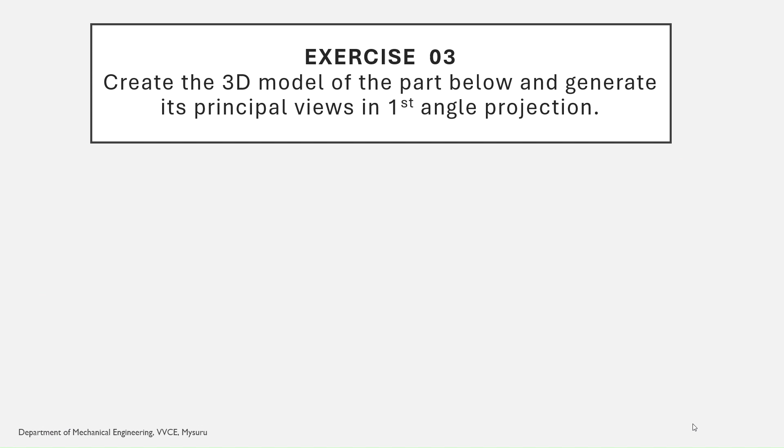In this video, we shall see how to create a part model and also prepare the draft for the same using the Solid Edge 2023 version. We need to create the 3D model of the part shown below and also generate its principal views in the first angle projection. This is the part we are going to create first using the part modeling of Solid Edge 2023, and then create the draft of the same.

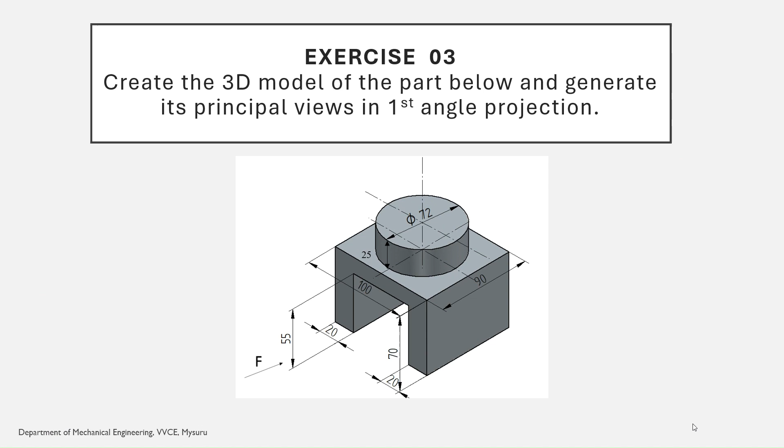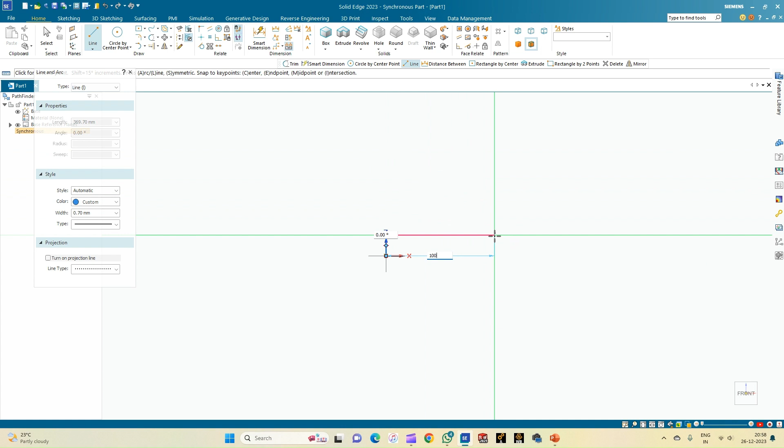Now I'll move the cursor over the XZ plane and the lock symbol indicates that the plane is locked and we can start with the drawing. The height is 70 mm and it is having a length of 100 mm. Let me complete the rectangle first. 70.

Now I'll fit this to the screen so that it is visible. And now let me go to the smart dimension. It is having a height of 70 and a length of 100.

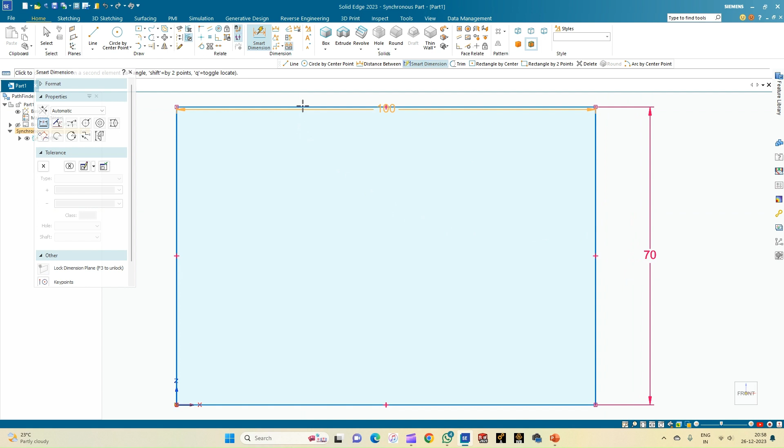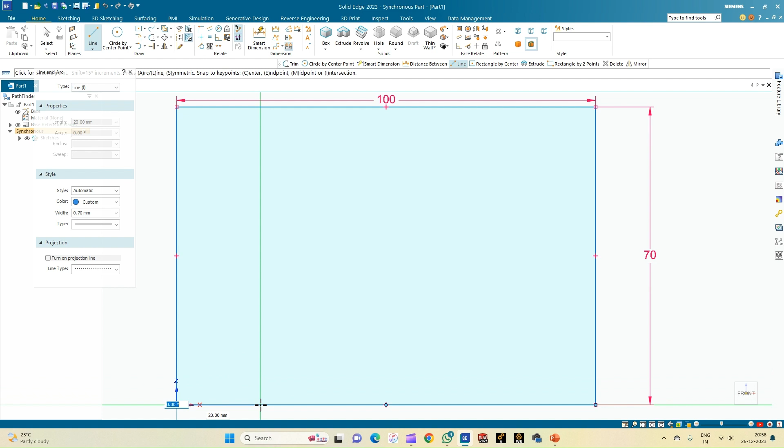Now I have to create one more rectangle for the web that is having 20 mm. I'll create, for reference, a 20 mm line, and that should be till a height of 55 mm, followed by the total width of the cutout which is 60.

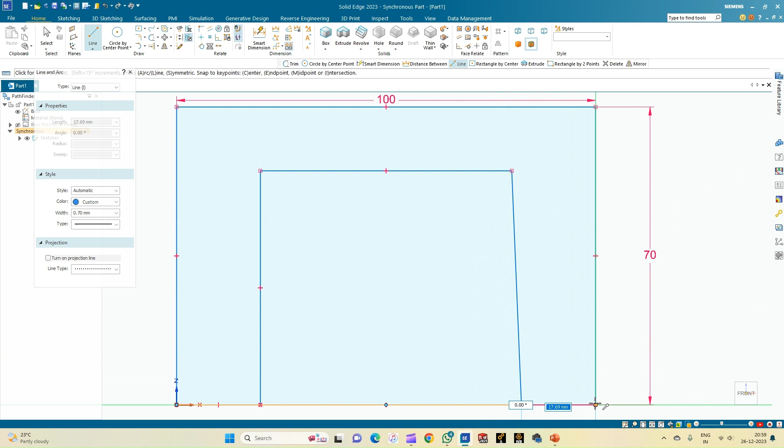Let me complete this profile and ensure the line is exactly plus 90 degrees. I'll go for the trim option. I'll trim this, and there are two more lines to be trimmed, and now this part is ready.

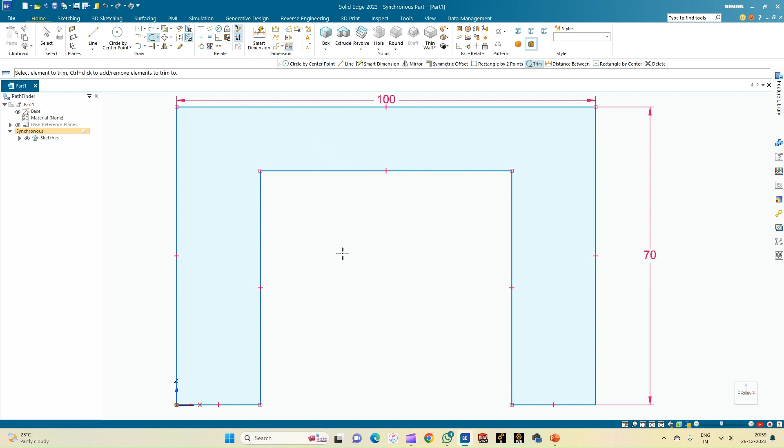Now we have to extrude this part to a distance of 90 mm as per the drawing. I'll go for select and select this, and by pressing the scroll button of the mouse I'll be able to rotate, and let me extrude this to a total distance of 90 mm.

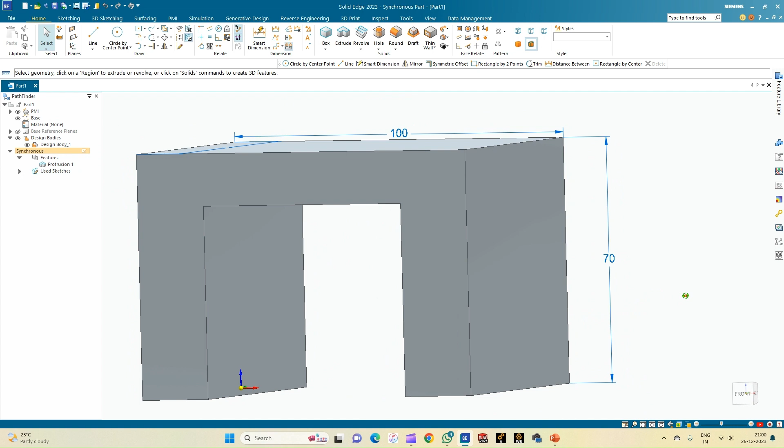I'll click on fit again. You can see that the part is ready. This is the front view of the part. You can just see this.

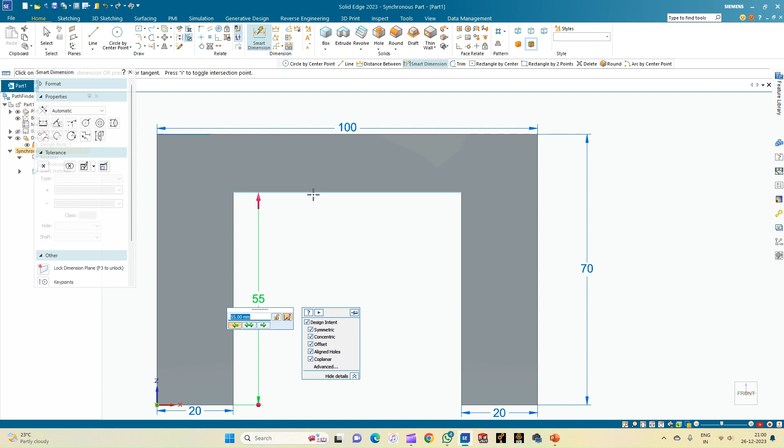Let me show the dimensions. This is 20, a web of 20 mm on both sides, and the height is 55. This is well understood that it is 100. This is 20 and 20, so this shall be 60 mm. 60 plus 20, 80 plus 20 is 100. And now it has also been extruded to a distance of 90 mm. This is the front view.

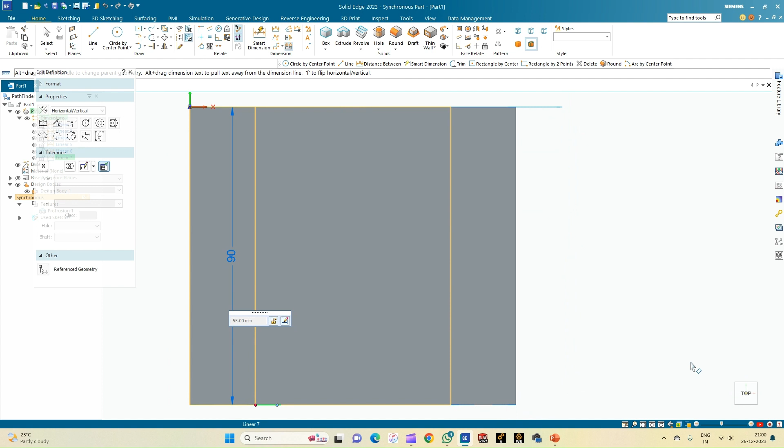But on top of this rectangular web, there is also a cylinder of height 25 mm and a diameter of 72. To create that, I'll select the top plane, and now I'm going to draw the circle.

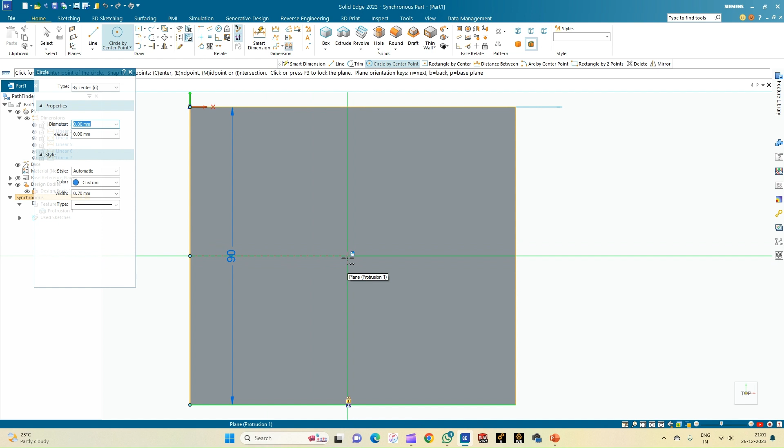To draw that circle, I'm going to take the center point of this particular rectangle as the reference and move the cursor and also mark the center of this. So I'm getting the center here. Let me draw a circle of any arbitrary diameter.

I'll go to the smart dimension, measure what is the diameter. So the diameter is 72. But you can just still see that it is not exactly at the center.

So let me select the top view, go for distance between. I'll select the circle, center point of the circle, and also the center point of this, which is exactly 45. Again I'll select center, move the cursor over the circle so that the center point is highlighted, and then select the center point of this particular rectangle. You can just move the cursor here.

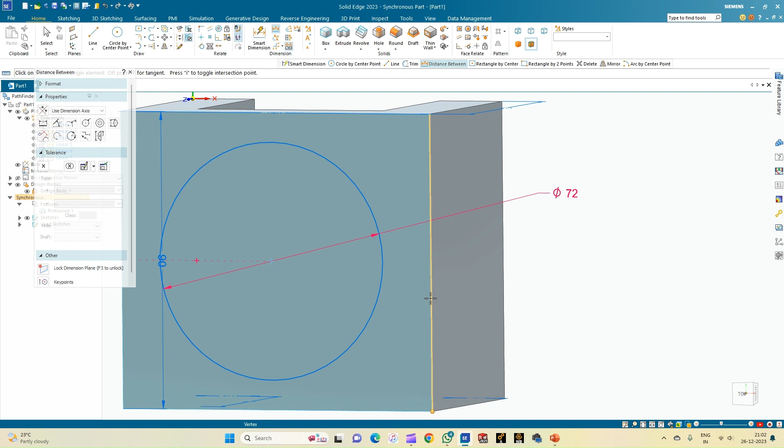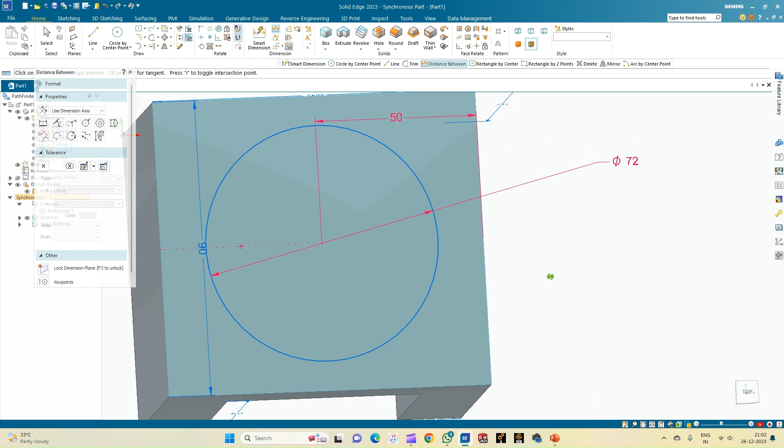You can just see that it is not exactly 50, so I'll enter 50. Now the circle is exactly at the center of this particular rectangle, that is 90 cross 100. So this is the top view.

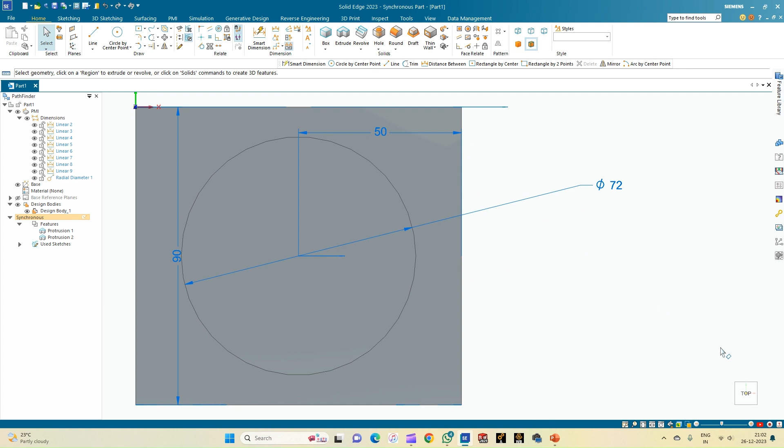Now let me select this particular circle and extrude this circle to a distance of 25 mm and press enter. So this is the top view of the web. And now I'll be generating the front view. So this is the front view. So this is the completed part.

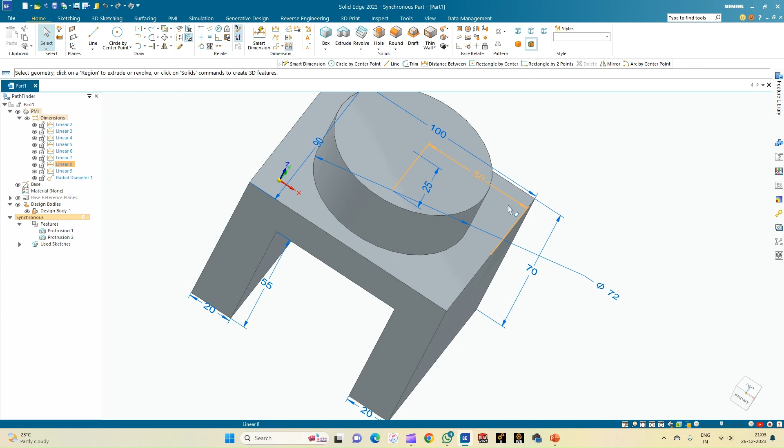So you can see it is having a dimension of 55 cross 50 here, with web on both sides of 20 mm thickness, and the total extruded length is 90 mm. Over that there is a circle of diameter 72 to a height of 25 mm. So this completes the generation of the part diagram.

So this is the isometric view of the particular part. Now let me save this. Clicking on the save icon, I'll enter it as exercise 03. Click on save.

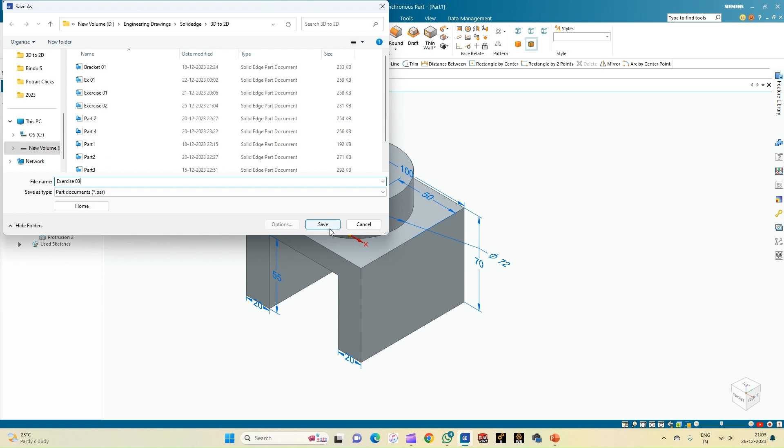Now to create the draft of this particular part, I'll go for new, select ISO draft. I'll right click on sheet 1, select sheet setup, select A4, untick show background, click on save defaults, click OK, and let me fit the sheet to the screen. So I'll click on view wizard and select exercise 03, click open.

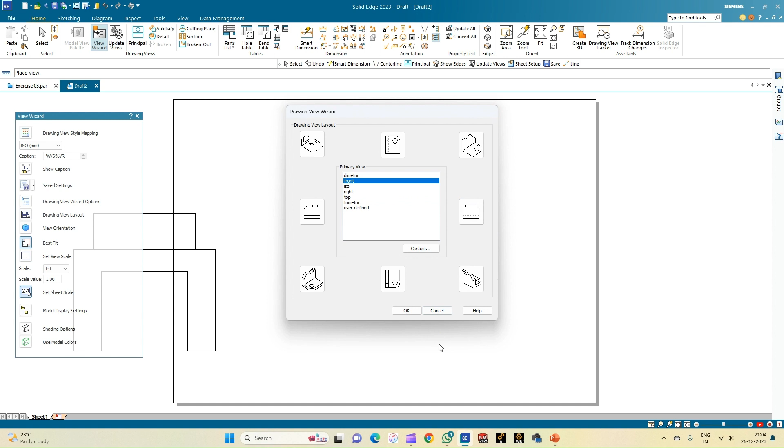So I can go for the drawing view layout. Let me select front view here, click OK. So I'm getting the front view, the corresponding top view, and this is the corresponding side view of the part. Now I'll go to the sketching window, select the line option.

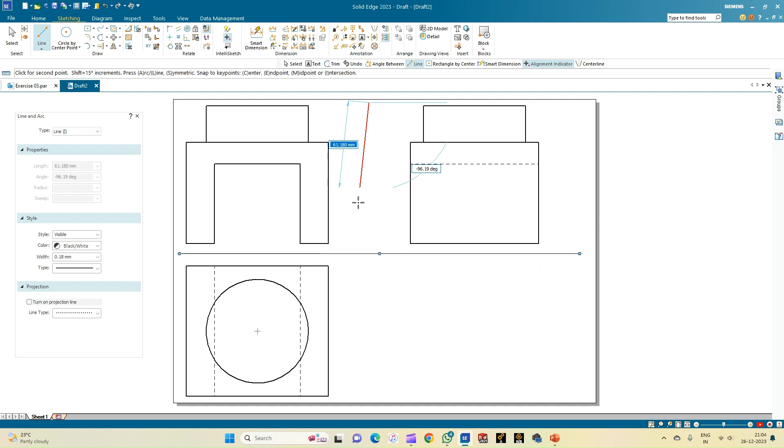Then select the thickness of the line to be 0.18 for drawing the XY line. So I'll draw the XY line here and draw the profile plane, that is X1, Y1. So from the point of intersection, let me draw the 45-degree line to generate the side view.

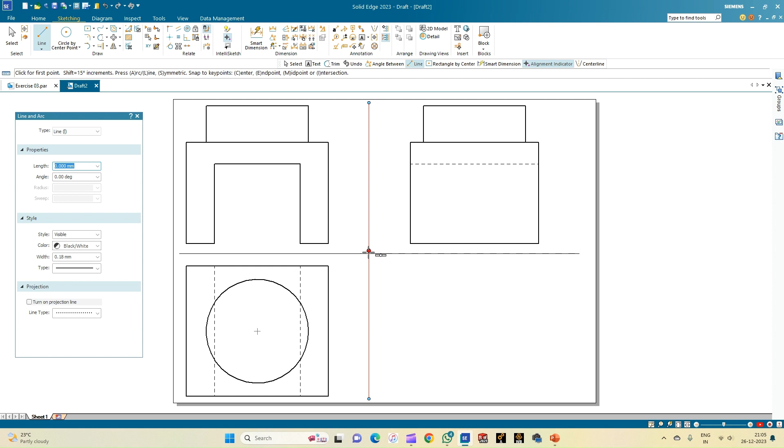So for time being, I'll just switch off the midpoint. So now I got the minus 45-degree line.

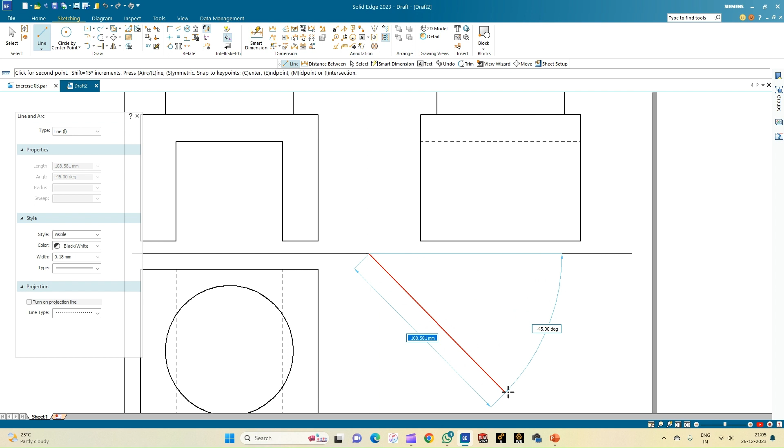So I'll just fit and then draw this particular line. So I have to draw the projector lines. This is just to show how the views will be generated. So the projector line from these edges.

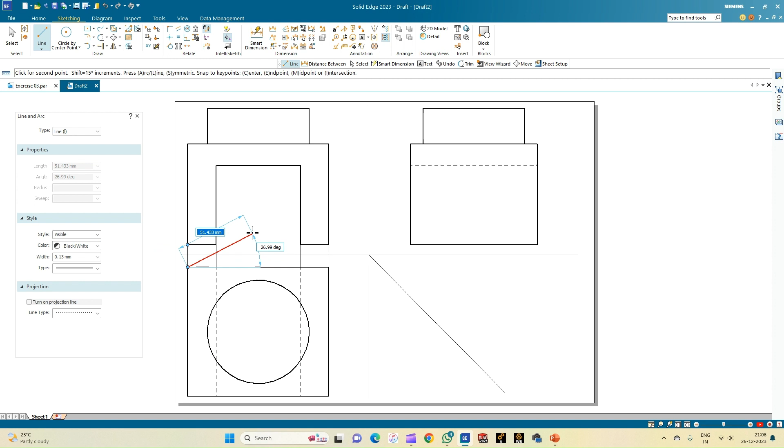Since this web is not visible, it is shown in the dotted line in the top view. But however, this is the outer edge and this is visible in the top view. And now I'll generate the projector line. See, it is going to intersect exactly with the circle.

So now what I'll do is, from here, I'll just intersect this 45-degree line.

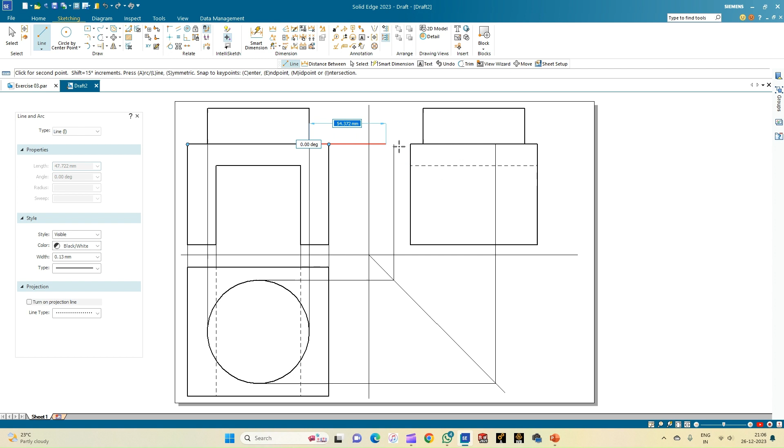So now what I'll do is, I'll select this view and then select the move option, ensure the copy is off. And then I will move this particular part and just slide it so that it is intersecting with the projection line, so that I'm getting the side view as per the standard procedure.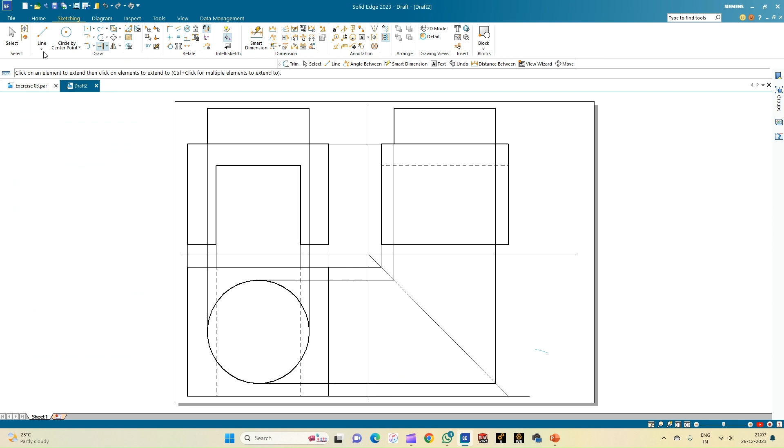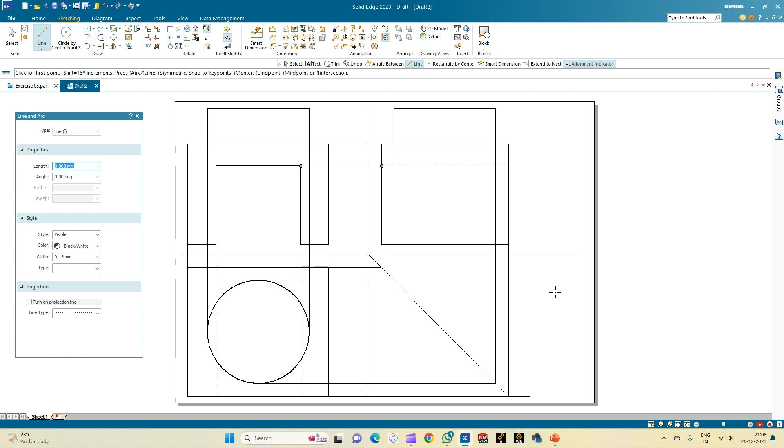So this is how the side view will be generated systematically. But however, since you have already generated the side view automatically from the part diagram, you can just rearrange by using this particular technique to align your views, that is the top and front views.

So let me change the font size to the Times New Roman font. So this is the profile plane X1, Y1, and this is the XY line.

So I can name the views. So this is the front view, this is the top view, and this is the left side view on the right profile plane.

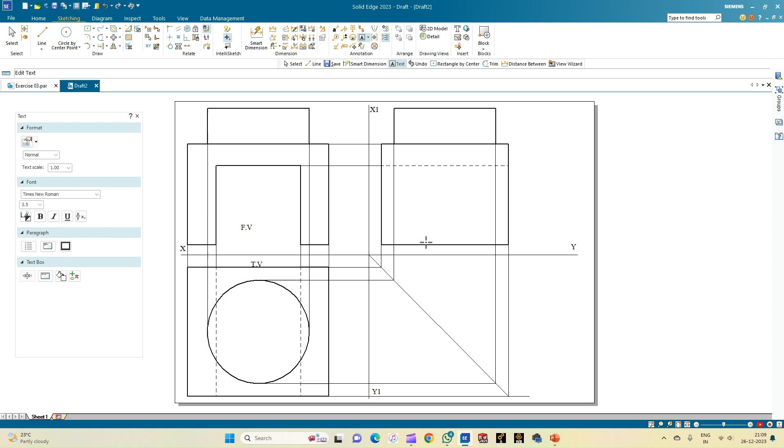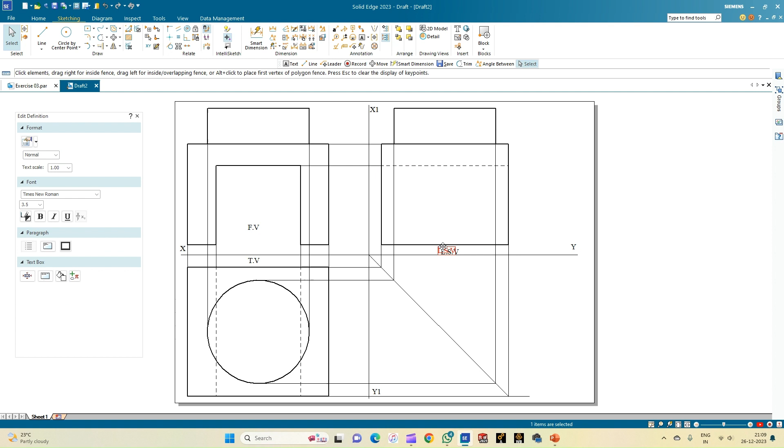Avoid keeping the annotations inside the part diagram. It is not a good practice to have the part labels or the reference planes named inside the part. So you can just show the dimensions here.

So this is a dimension of 70 mm, the extruded length of 90 mm, correct? So here you can show the height of the cylinder, the diameter of the cylinder, and then the width of the web.

So the width of the web on either side, and this distance also can be shown. So go for distance between. So this is the thickness of the web in this direction.

So again go for the smart dimension. So this is the total length of the part.

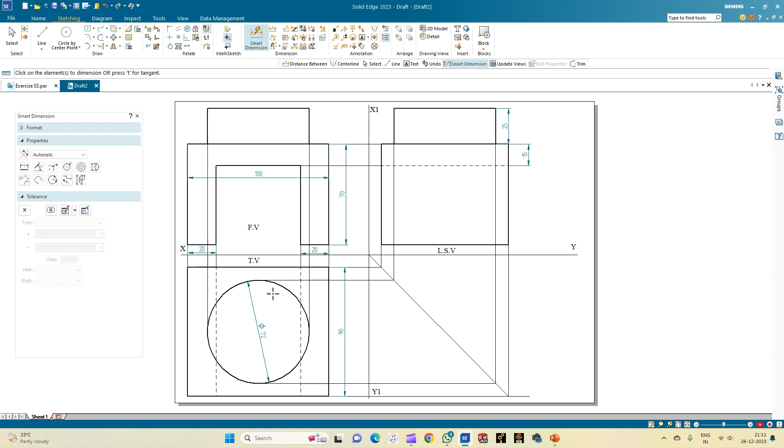So with this we have completed the necessary dimensioning of the draft that is created out of the part. So with this we complete the part modeling and also the draft preparation of the concerned part. Thank you all for watching.